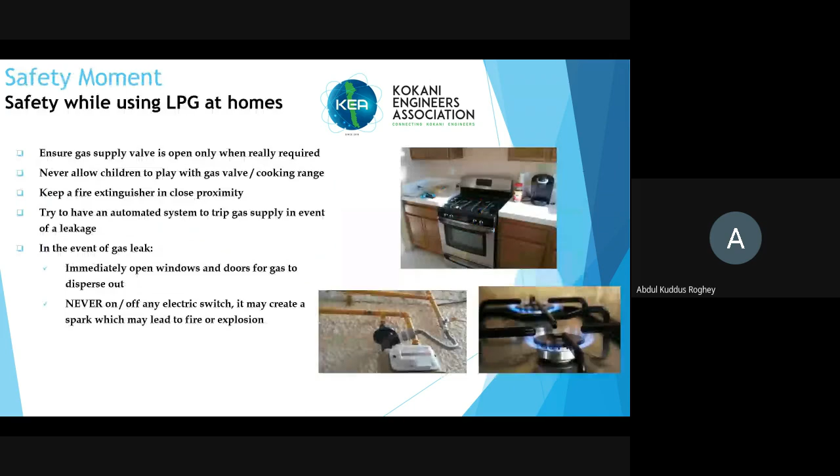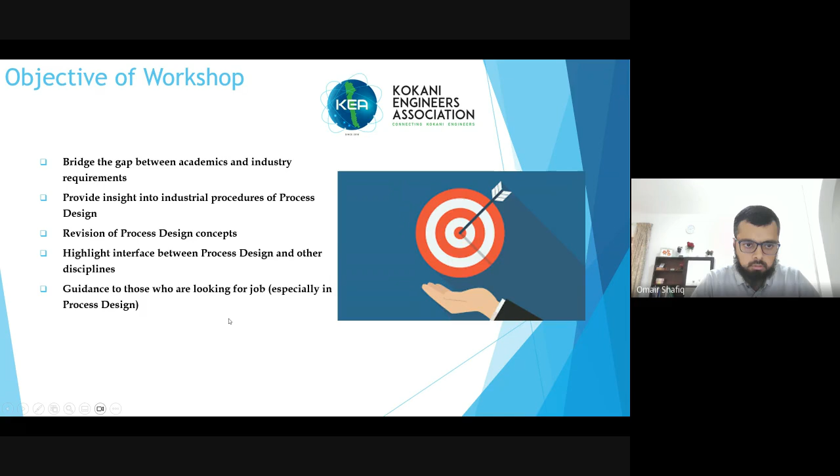We had seen a safety moment, and we had seen the objectives of this workshop also. Then we had seen basically what process plant design is all about, and why process plant design is important, or the significance of process plant design. So until here, if anyone wants to know anything more or wants to add anything, please let me know.

Omair, I have this question that most of my juniors ask me: what is the better way to have this transition from academia to the design field? And what are the preliminary requirements to get into process design, specifically process design? Could you please highlight some points so I could share with them? Because what I could share is that whatever you have learned in academia for 4 years, you just stick to those basics and apply them in your initial stages. Anything apart from that, would you like to add?

The answers to your question could vary from different people with different perspectives, but I would like to answer based on my experience and what I've heard from my colleagues as well as my juniors. One thing you should do if you want to move into process design is have a strong background, or if you feel you don't, you need to develop a habit of continuous reading. Whenever you have free time, keep reading about process design. Start from the basics, like line hydraulics, heat exchangers, and all, and keep reading from different places—books, online articles, API codes, and so on.

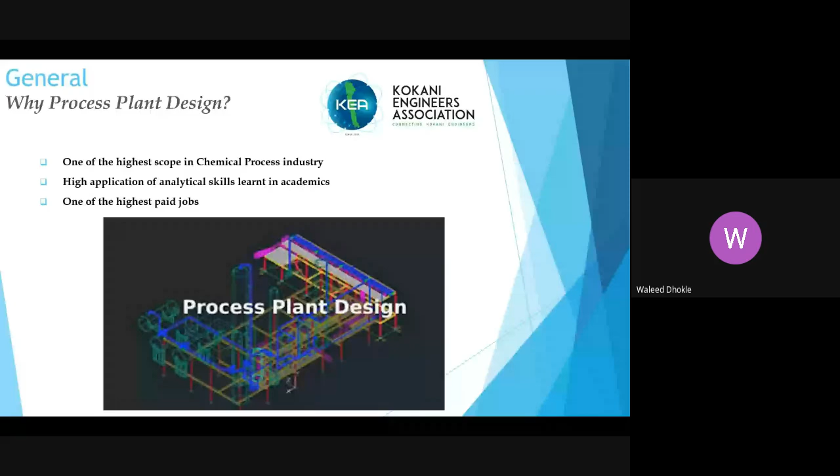Let us look into the details of each stage. We'll start with the first one, the concept study phase. What is done in this phase? The very basic things, like which technology would we use, and a basic diagram or basic flow sheet to be used. Those kinds of things are defined in the study phase.

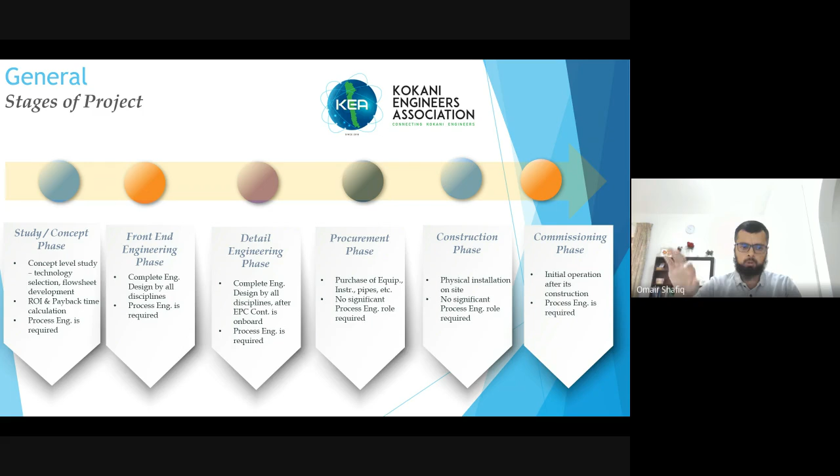Likewise, for instruments, the process engineer's job is just to specify that in such and such location, I want a flow indicator, and it has to operate from a range of 100 to 180, with so and so design conditions. That is what the process engineer has to tell. But the instrumentation engineer has to take responsibility for all the detailing of the instrument, like what instrument class it will be, what kind of automation link, hardware link, software link, coordination with the vendor, etc. So all the detailing will be done by other engineering disciplines.

Once the procurement phase is completed, next will be the construction phase. It is basically the physical installation or assembling of all the equipment, pipes, instruments, etc. in the field. In the construction phase also, usually there will not be any significant process engineer's role.

The last but not the least is the commissioning phase. Commissioning is the initial operation after the construction, after the equipment has been purchased, brought to the site, constructed, assembled, installed, everything done. Once the process fluid first starts to flow, that is called the commissioning phase. And the commissioning phase has its own challenges. It is commonly said that the commissioning phase is the most challenging phase of all.

Because in the design phase, it is just by using pen and paper, or everything stored in the form of documents. But the real challenge is seen in the commissioning phase, because even though the design was done well, everything was done good, there will still usually be several challenges once you start to operate for the first time.

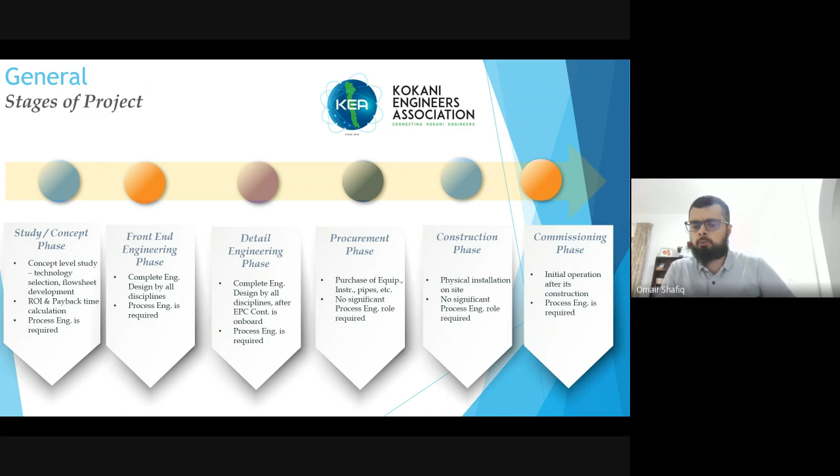Okay, this is something I'm not the right person to answer, because personally I have never done pre-commissioning work. I had done commissioning work, but never pre-commissioning. But I'll tell the very basics: before any commissioning activity is started, there will be several activities to be done, mainly by the process engineer and also by other engineering disciplines. During the design phase itself, during the FEED or during the detail engineering phase, there will be a document called the pre-commissioning and commissioning philosophy, which will outline all the commissioning aspects of that particular plant. Several other activities like P&ID have to be checked in detail, and several other documents have to be checked before the commissioning activity starts.

Okay sir, thank you. Also there is one basic engineering package. So what is the difference between this FEED and BEP?

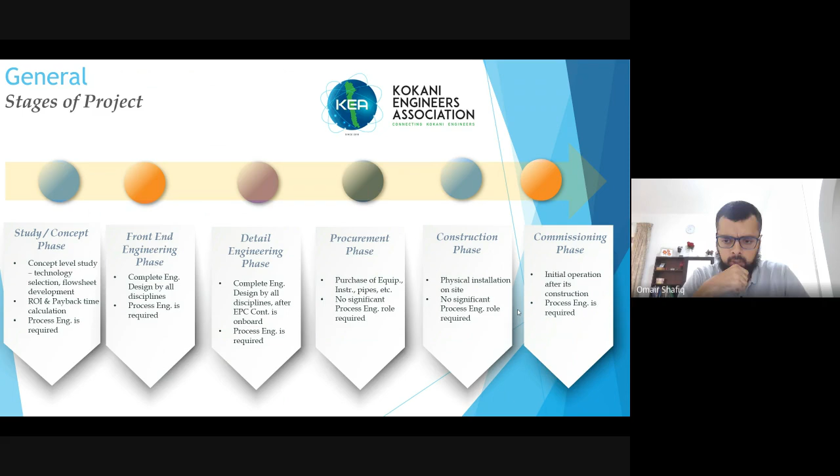Now, that is also something that varies from region to region and from company to company. For the FEED itself, what I have explained is all based on my experience with ADNOC. For ADNOC, the FEED stage, the front end engineering design, has to be done in a detailed manner. In some companies, like one I worked for in India, they had established that in FEED it is only the process engineer's design. All other engineers' design, like mechanical, instrumentation, electrical, etc., does not come into FEED, so they call that a basic engineering package, what the process engineers designed. It varies from case to case and from company to company.

Okay sir, thank you.

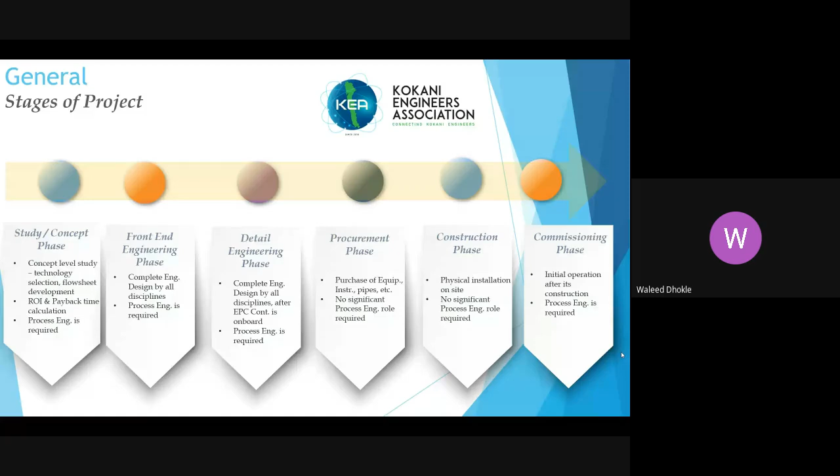To add to that: a project is divided into systems and subsystems. During construction, they define, okay, this is our subsystem for building, for example SS BLD. When the subsystems are combined, you have completion of one system. At the phase when construction is over, you have something called the mechanical completion certificate. Once it is mechanically complete, the construction element is over, and there's a phase called checking of the subsystem, like functionality checks and so on, before it is completely commissioned.

Some projects consider this as part of construction, some consider it as part of commissioning - there is no fixed concept of pre-commissioning. It can be part of your construction activity or part of the pre-commissioning activities, because it's a phase between construction and commissioning where you are checking the readiness of the particular subsystem, like functional checks of the loops and so on. Once the subsystem is okay, you go for the systems, and then the next phase comes commissioning, when you're totally ready to start up the process or system altogether.

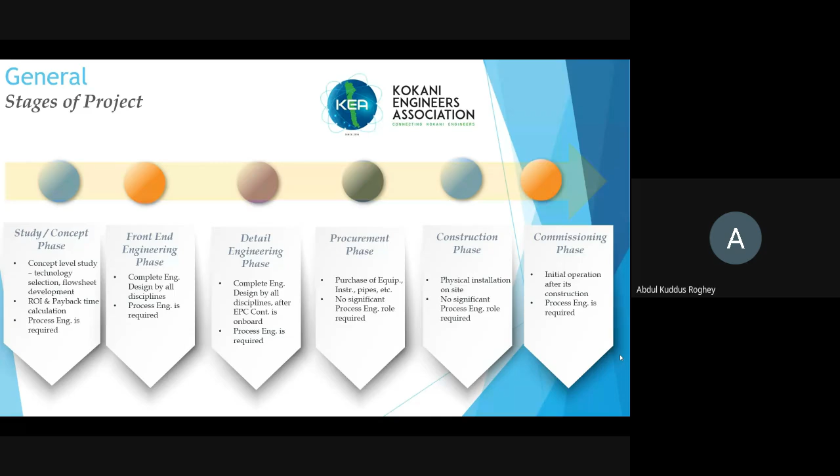Omair, back to you. Thank you, thanks for the explanation - I also got to learn something new today.

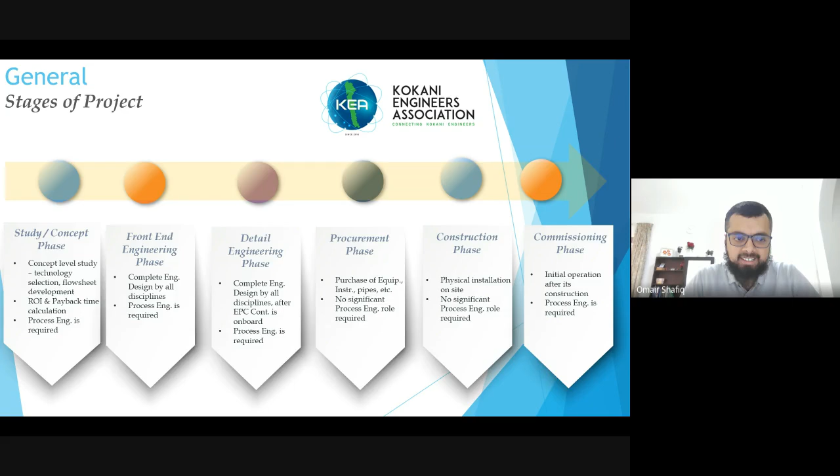Okay, so let's move on to the deliverables. This is our next topic of this workshop. Let us look into what is meant by deliverable.

Literally, deliverable means something that can be delivered - like a package from Amazon, Myntra or Flipkart that is delivered to our house. It is a packaged thing comprising whatever we have ordered, usually kept in a neat, orderly, organized, structured form, such that when anyone looks at it, he feels good. In the terminology of process engineering design, or of a project, deliverable means some document or engineering package which can be delivered to the concerned party - it can be delivered to other engineering disciplines within the engineering company, or to the construction person, or to the client, such that it should have a meaning.

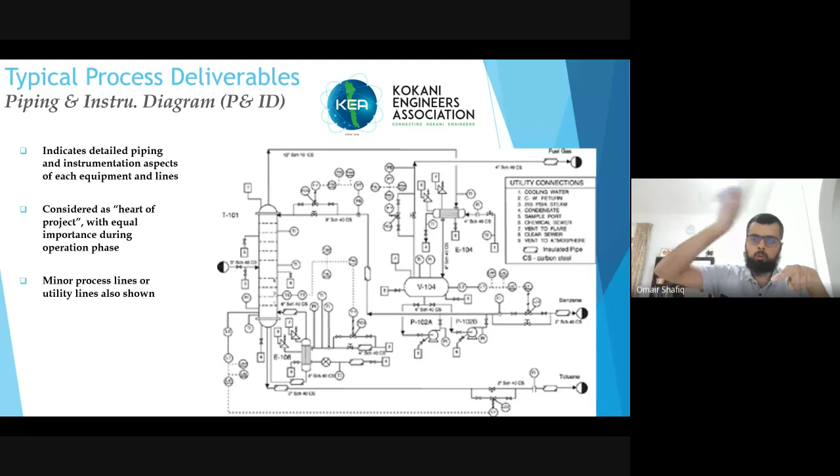Once PFD is established, a P&ID will be made. P&ID stands for Piping and Instrumentation Diagram. It looks somewhat like this. In the P&ID, it basically indicates the detailed piping and instrumentation aspects of each equipment and each line. Each and every process item, be it major or minor, is shown here, like each equipment, each pipe including half-inch or quarter-inch pipe, and each instrument, each automation connection - say so and so instrument is connected to so and so valve, how it is connected, hardwired or through a software link, whether it is located in the field or in the control room, or through PLC, SCADA, etc. These things will be symbolically shown in the P&ID.

P&ID is a document which is considered the heart of the project. Very often, when any other engineering discipline other than process has to look into the design of a process, they don't come to the process engineer to ask about the design. The norm is that they just look into the latest copy of the P&ID, and whatever is shown in the P&ID is considered as reliable information for them. So it is common to call it the heart of the project - out of all the documents, the most important is P&ID.

That's why in engineering companies, too much effort is spent on the preparation of the P&ID - not just the preparation, but its review by other concerned engineering disciplines. The review of the P&ID is also considered one of the most important and most critical aspects of the entire design activity.

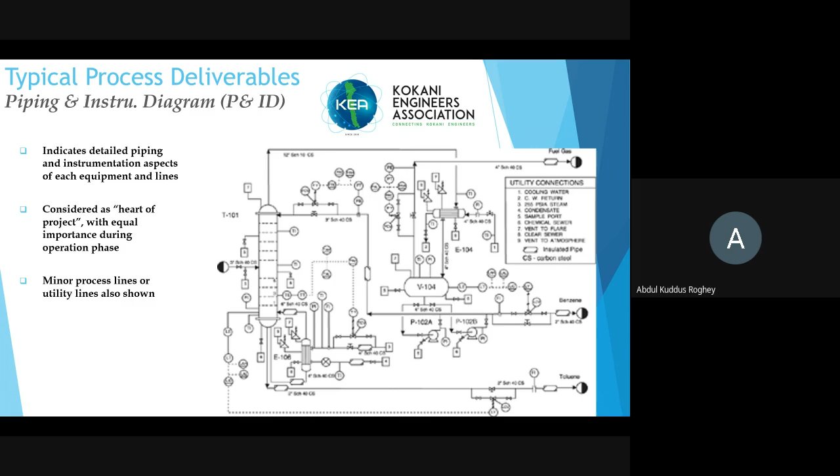Okay, clear. Yeah, clear. Thank you, Omair. Okay.

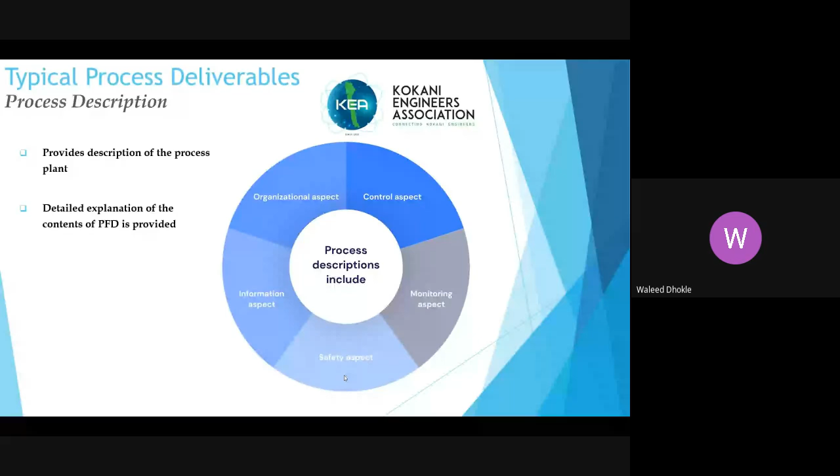Omair bhai, yeah please, will you be sharing this recording in the group, or is there any other folder you'll be keeping, or will you be sharing it on OneDrive? Well, I will be sharing it, but I myself am not sure exactly how, because it is being recorded, and once the recording is completed it will automatically get uploaded to my OneDrive link. So from there, can I directly share the OneDrive, or do I need to download it and upload it again? That I'm not sure at the moment, but inshallah I will be sharing it. Okay, I think you need to download it from your OneDrive, because we won't be having access to your OneDrive. So if you could download it, and share a G Drive link or something of that kind, it would be very helpful. Okay, inshallah.

Let's continue now. Just confirm once if you're able to see my screen. It's visible and it is changing, right? One of you, please confirm if the changes are being observed, like when I change a slide, is it being seen?

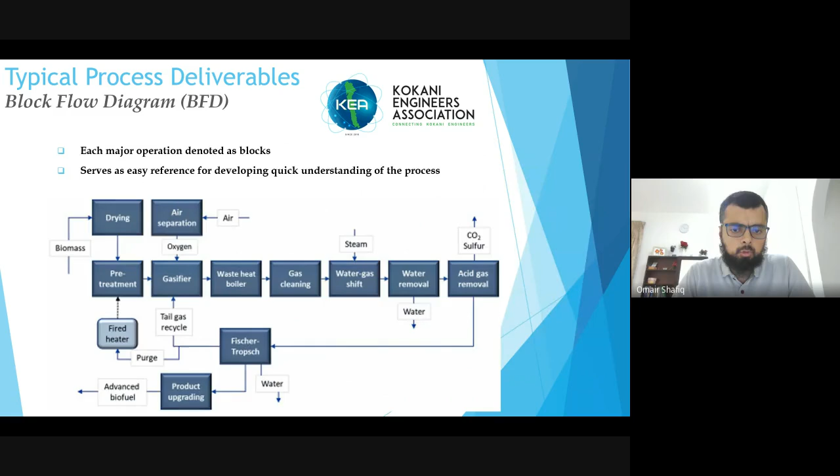Okay, so let's continue. Before the break, we had seen the deliverables or basic deliverables which are called drawings. We had seen BFD, PFD, and P&ID. Now, the next deliverable is process description.

It is basically a document prepared by the process engineer in which the process items are described, or in other words, it is called a write-up of the PFD. In the PFD, each process is indicated in the form of drawings, but drawings leave room for confusion or different explanations. Because of that, a separate document is made called the process description, in which the aspects shown in the PFD are described in words, starting from the initial feed all the way up to the final product, and whatever process activity goes in between is also explained in words.

The description includes aspects like safety, monitoring, control, etc.

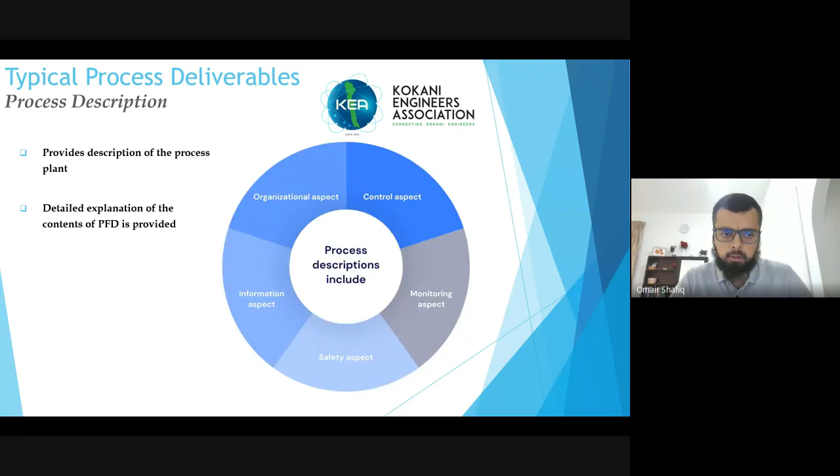So it's kind of a detailed record in which, for each stream or part of the process, what are the conditions - pressure, temperature, enthalpy, etc. - are captured.

And it serves as an input to equipment sizing and line sizing. Once I develop the scheme and need to start with equipment sizing, I need to know whether this column's height will be 5 meters or 20 meters, or the capacity of the pump - should it be 100 or 200, etc. So to calculate the equipment sizes, the H&MB serves as a quick reference.

Likewise, to do the sizing of each line shown - should the line be 8-inch, 12-inch, 2-inch, etc. For doing the sizing of each line, H&MB serves as a quick reference. In such and such line, based on the flow rate and operating conditions, my size will be 3-inch, suppose here it will be 4-inch. So it serves as a reference for the entire equipment and line sizing.

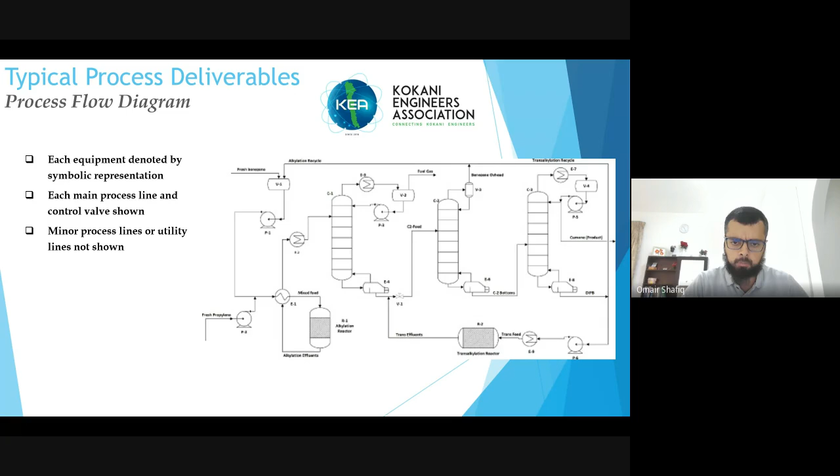Inshallah, when we look at Aspen HYSYS, we will be looking at development of H&MB as well. That was about H&MB. Before we move on, I would again like to pause here so that if anyone has any query, we can discuss further.

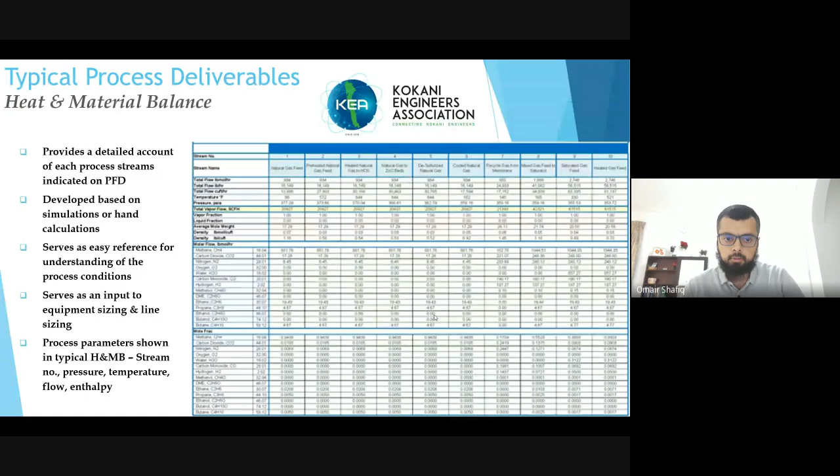Let's move on. Let us move on to operation and control philosophy.

Once the drawings are completed, once the process design basis or the basis of design has been established, and once the H&MB has been developed, the next important thing is operation and control philosophy. This document outlines the philosophy of operation and control of the entire plant, from the battery limit inlet or the main feed up to the main product, and not just main, all the inlets and all the outlets. What is the philosophy on which you will operate it?

Here, the operating conditions with the entire operating envelopes will be defined. By operating envelope, I mean the range of operating conditions, like minimum flow will be 100, normal will be 180, maximum 200. So the operating envelope is from 100 to 200. Similarly, minimum temperature may be 70 degrees, maximum 90 degrees.

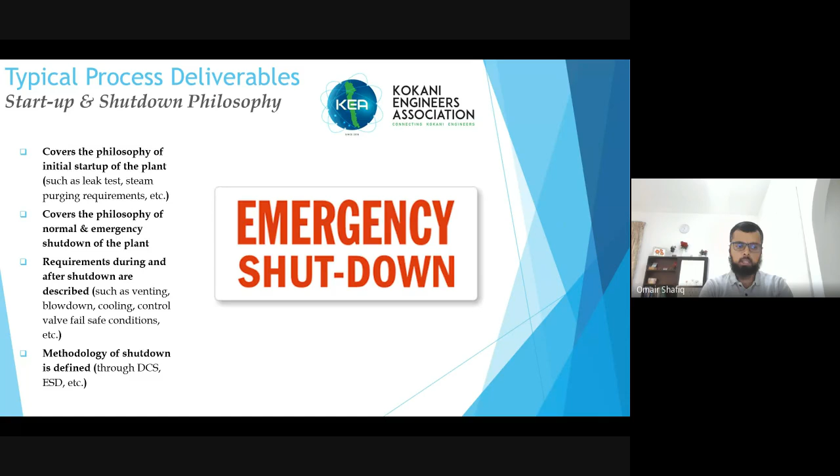Now, the methodology of the shutdown - will it take place through a DCS or through an ESD? And will it be through a hardwire, a software link, or anything else? These kinds of things are explained in this document.

Till here, does anyone have any further doubt or discussion?

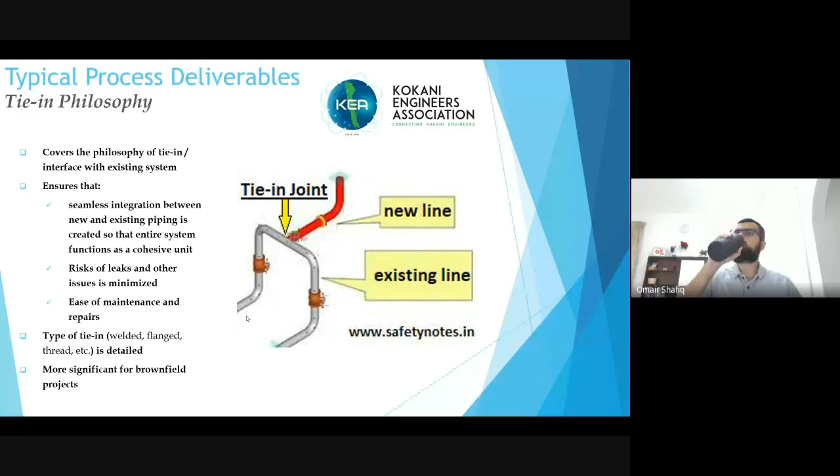Yeah, Umar bhai, assalamu alaikum. Islam. Am I audible? Yes, yeah, you are audible. Yeah, it's not a doubt, I just want to add something. This is not related to this particular slide, but the one before. Sure, just correct me if I'm wrong or if something needs to be added.

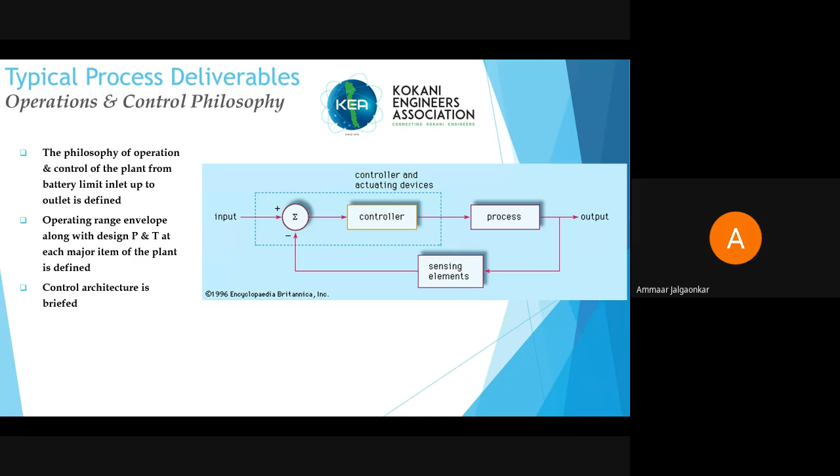Am I right, Mr. Umar bhai? Yeah, what you have mentioned is about something which is already pre-decided. Yes, that is also something that varies from project to project and from company to company, and it varies based on the nature of the type of contract. There will be some clients who, in the scope of work itself, will mention in detail about the control aspects. So in those cases, the engineering contractor, whoever it is, like the process engineer, instrumentation engineer, etc., they have to just stick to that, whatever it is. And in that case, this will just be an elaborate description of the scope of work.

In some cases, from the client side, the entire scope of work, even though the project might be worth hundreds of millions, the scope of work document itself will not be more than one page. So in those cases, this type of control aspects will not be detailed, and it is the engineering contractor or engineering consultant who needs to do the design in detail, and the client has to approve or reject it.

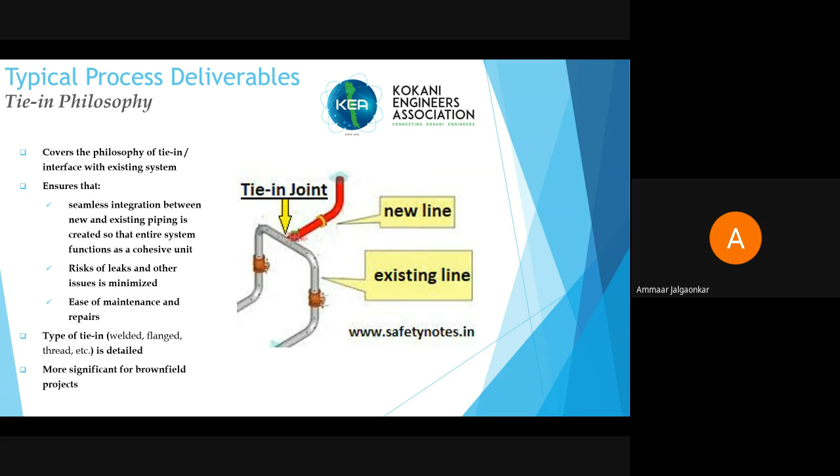The next document which has to be prepared by the process engineer would be the tie-in philosophy, or tie-in, like how you are going to tie in with the existing system. In most projects, some plant is already there and an additional plant will be built, or some equipment or packages are already there and additional equipment will be installed, maybe to increase production or to overcome some maintenance issue. The new plant is made and it has to be tied in or interlinked with the existing one. So this document, called tie-in philosophy, is also prepared by the process engineer, which covers how the new will be linked to the existing.

The aim of the tie-in philosophy document is to ensure there's a seamless integration between the new and existing piping, such that the entire system functions as just one cohesive unit. This means there will be several existing pipes, sometimes in brownfield jobs.

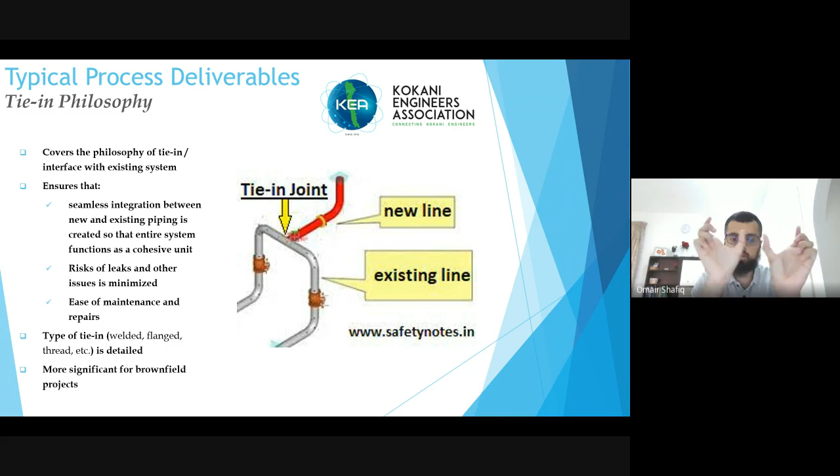Now, for each of the tie-ins, what type of tie-in will be required? This is something the process engineer will not be deciding, but rather the piping engineer or mechanical engineer who has to decide this. For each type of new and existing tie-in, does it have to be done by welding, by a flange, by a thread, or anything else? That's what this document covers.

Next is about vent and drain philosophy. This document basically covers the philosophy of emptying the contents of the process plant.

If the process plant has several liquids, gases, solids, two-phase, three-phase, etc., when we want to empty it out, how are we going to do that? Normally gases are emptied through vents, liquids through drains, and what more? So it's all about how you empty out the contents of the plant.

Emptying can be either normal or emergency. Normal emptying is usually done through scheduled draining or venting, and emergency emptying is done through depressurization valves, blow down lines, or PSV reliefs. So under normal and emergency conditions, how are we going to empty out the contents? That is covered in this document.

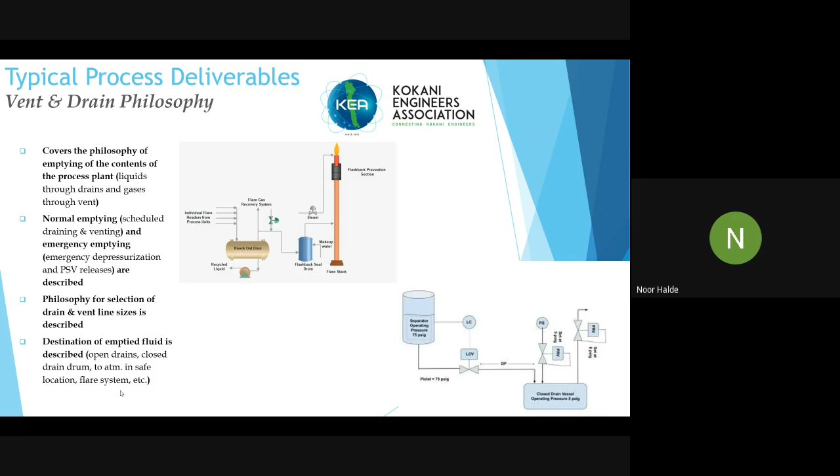Omair bhai, is there any standard format available to prepare the control philosophy? I heard about the sequential flow chart, but I am not aware of any standard format for control philosophy.

Okay. Format, now, that is something each company has its own format for. I can also take something and share it with you.

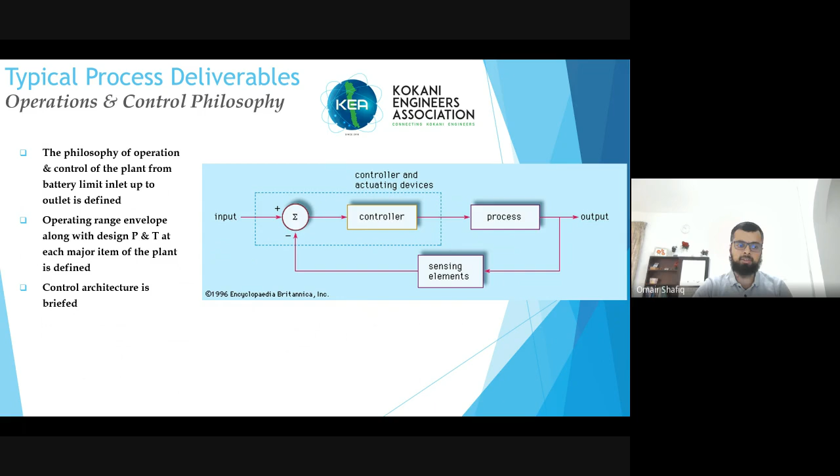But yeah, the bottom line is the same. Irrespective of the format, it has to cover the entire operating envelope from each part of the plant. Its operating envelope must be covered and its control envelope must be covered. That is the basic thing. Now, company to company, project to project, the format may vary.

After vent and drain, let us go to another document called process safeguarding memorandum. How are we going to safeguard the process, what are the levels of safeguard, and what is the philosophy or way in which the safeguard will be established? Those things are covered in this document.

One of the basic things is having an ultimate safeguard for any plant, to avoid any mishap or accident happening. There are 3 levels of safeguard. The first level is the design pressure itself. It is kind of an inherent safeguard.

To explain this further, suppose a particular part of the process plant is operating at a pressure of 8 bar gauge, and the design pressure for that part of the plant is 12 bar. So 8 is the operating pressure, but it is actually designed to withstand 12 bar. That additional 4 bar margin is itself a safeguard. What if the pressure increases all of a sudden, or something goes wrong? So an inherent safeguard is there: 8 is operating, design is 12, 4 is the safeguard.

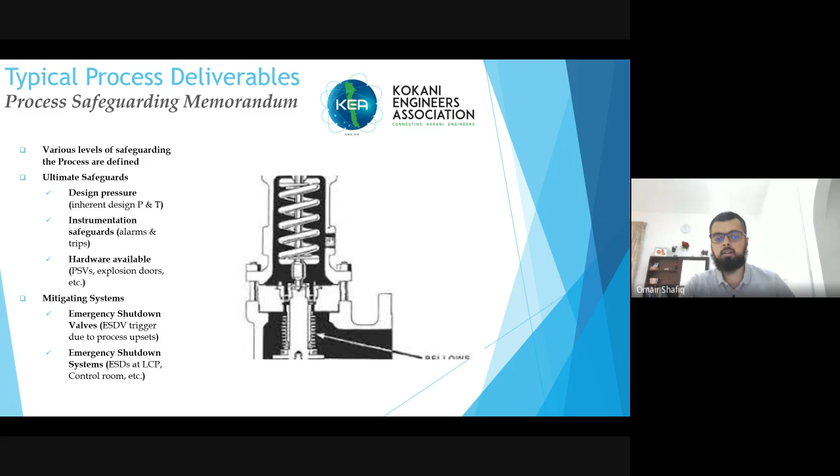So to avoid that happening, there has to be an automatic system in which as soon as the level exceeds a particular limit, the inlet valve has to close. So what do you say here?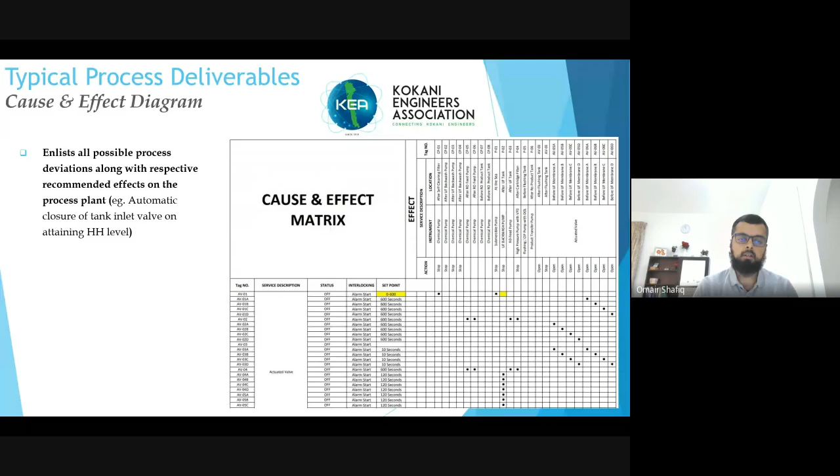Another thing which is related to cause and effect is alarm and trip list. This is another document which has to be made by the process engineer, in which the details of each alarm and trip, the values of each alarm and trip will be mentioned.

Just an example of what I gave: 8 bar was the operating pressure. At 10 there will be an alarm, and at 11 there will be a trip. So the list of all these alarm values applicable for that particular plant, along with the trips, will be mentioned in this alarm and trip list document. Although not always the same, but usually it lies under these values.

If the value goes to 80 to 90%, an alarm has to ring. At 90 to 95%, it has to trip. Just consider an example of a level.

Suppose there's a vessel in which the level can go anywhere between 0 to 100 inch. Level of liquid can vary from 0 to 100 inch, and normally it should be somewhere at half, or it should not be below 20% or should not be above 80%. But because of any reason, if the level keeps exceeding till it reaches 80 or 90% range, there should be an alarm to alert the operator that something is going wrong, immediately take action.

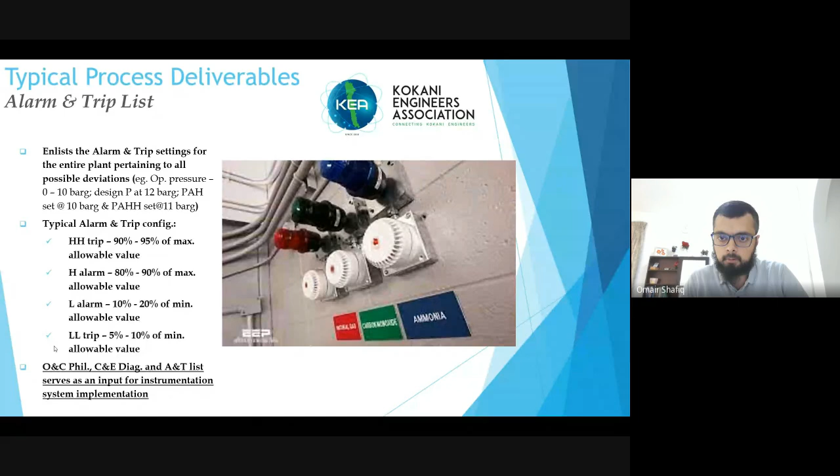Our next topic or next important deliverable is line list. A line list provides a list of all major and minor lines indicated in the P&ID. All of us have seen a P&ID, and in the P&ID, we have seen that each line is assigned a particular number, and for each line, the details of each line, or the details of each pipe, are mentioned in a separate document called as line list.

Line list is made so that it serves as an easy reference, or serves as an input to piping and instrumentation disciplines.

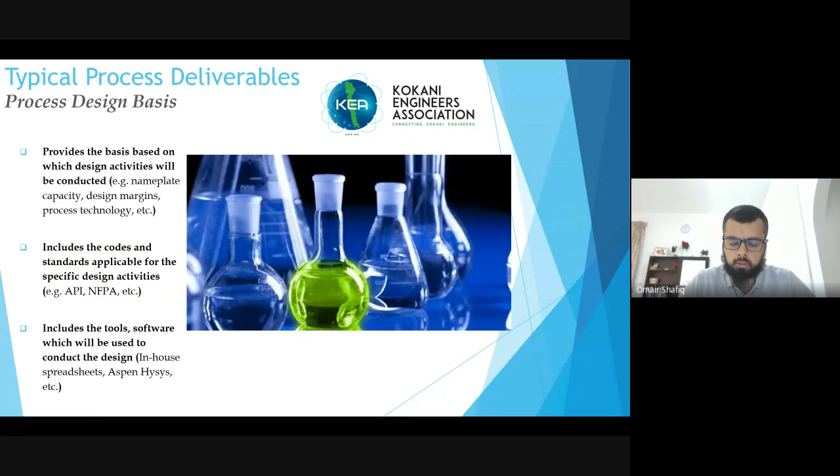As an example, if I had a P&ID over here, if any other discipline during the design phase or even in operation phase wants to know the density in this line, the line which comes from here to here, what will be the density, or what will be the operating pressure, or what will be the design temperature, based on those parameters, the instrumentation engineer will purchase the control valve. So it is very much vital, very much important to have the details of each and every pipe.

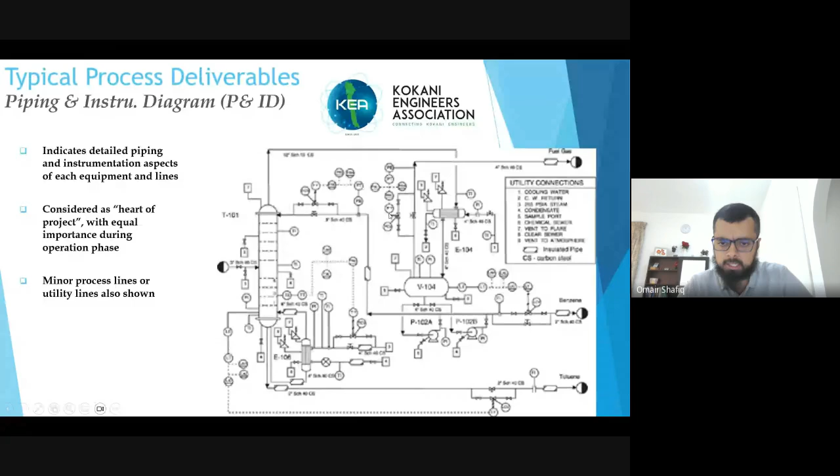So this line list document gives detailed information about each and every pipe in the P&ID.

Now, what kind of information will be shown in the P&ID?

What kind of information will be shown in the line list? Information like P&ID number, like so-and-so line, which I am mentioning in my line list, it is in which P&ID? What is the line number? And where is the line coming from? Say it is coming from a vessel, going to a compressor. So that should also be mentioned. It's coming from vessel number so-and-so, going to compressor number so-and-so.

And what are the operating pressure and temperature of that particular line? What is the design pressure and temperature of the line? What is the flow rate I'm expecting in that line? What is the velocity, what is the speed through which fluid will be moving in the line?

What is the density, viscosity of the fluid in that line? What will be the size of the line? 10 inch, 8 inch, 2 inch, etc. What will be the fluid? Will it be a hydrocarbon, corrosive, or liquid, or hazardous fluid, gas, etc.?

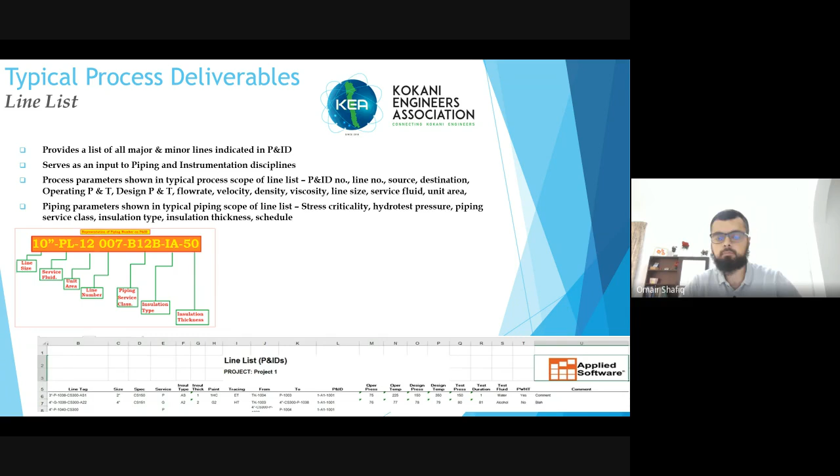The next topic is on equipment datasheet. Equipment datasheet is a document which is usually, although it is owned by mechanical - by saying owned means it is the responsibility of mechanical discipline, but inputs are given by the process engineer. Now, for each equipment, either it is a vessel, storage tank, pump, compressor, etc.

For each equipment, a data sheet will be made. And why is the data sheet made? Because the data sheet is made by the engineering team comprising of process and mechanical, and ultimately it is given to the supplier, or given to the vendor, so that the vendor can develop his design, or provide his cost. That is why equipment data sheet is made, or it is kind of a thing in which the engineering team transmits the information to the vendor by means of the data sheet.

Like, through the data sheet, the engineering team conveys to the manufacturer or to the vendor that I want this equipment, it should have so and so specification. So all these kinds of specifications for each equipment are captured in a document which is called the equipment datasheet.

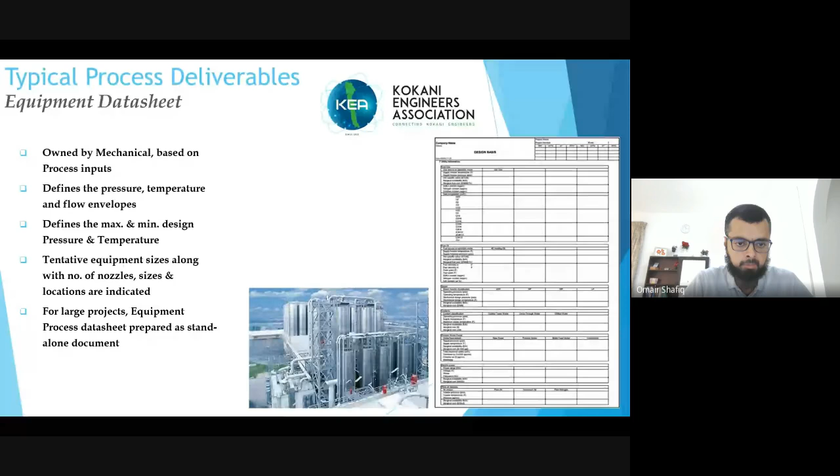Just a thing to be noted here: for anyone into process design, in some cases, especially in large scale projects, there will be 2 separate data sheets for each equipment. One will be made by the process and another by mechanical. The process equipment data sheet will only consist of process based information, and the mechanical engineer, based on the process data sheet, will produce his own separate data sheet which will be more detailed. But in small scale jobs, there will not be 2 separate documents, just one data sheet for each equipment. The mechanical engineer will own the data sheet based on inputs given by the process discipline.

Another thing identical to the equipment datasheet is the instrument datasheet. What we had seen for equipment, for each equipment in the plant, was kind of an interface between process and mechanical. Now, instrument datasheet is kind of interface between the process and instrumentation disciplines. It is owned by instrumentation, so the instrumentation engineer has to take responsibility, but it has to be made based on inputs received from process engineers. Again, identical to the equipment datasheet, the ranges of operating pressure, operating temperature, flow, design pressure and design temperature, all these things will be established in the instrument data sheet.

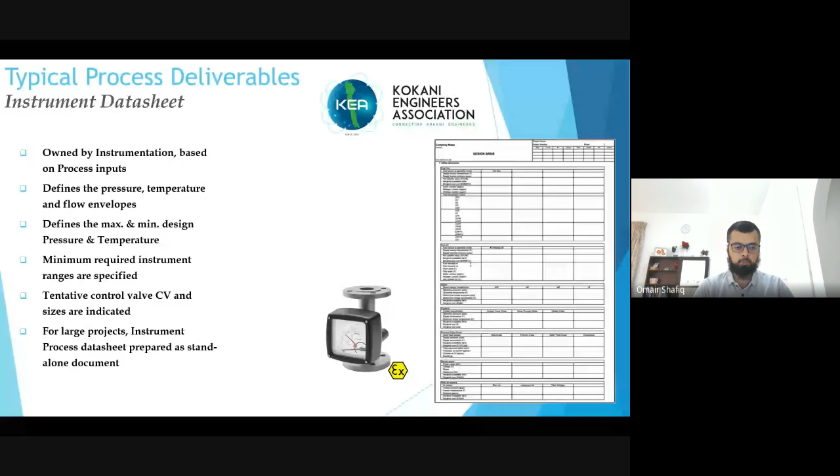A data sheet has to be made for whatever instruments are there. Again, like the equipment data sheet, if the project is quite small in nature, usually only one data sheet will be made for each instrument. But for large scale projects, two separate data sheets will be made: one by the process engineer, the other by the instrumentation engineer, which will be much more detailed than the process engineer's instrument data sheet.

It's all about this. The hazard analysis topic is something quite large, and just to cover it will need some good amount of time, so we can keep hazard analysis for our next week's workshop. It is almost 11:20 over here in UAE, so we can use the remaining time of this workshop to have some general discussions. If anyone would like more clarification on what we have already discussed, you can have it.

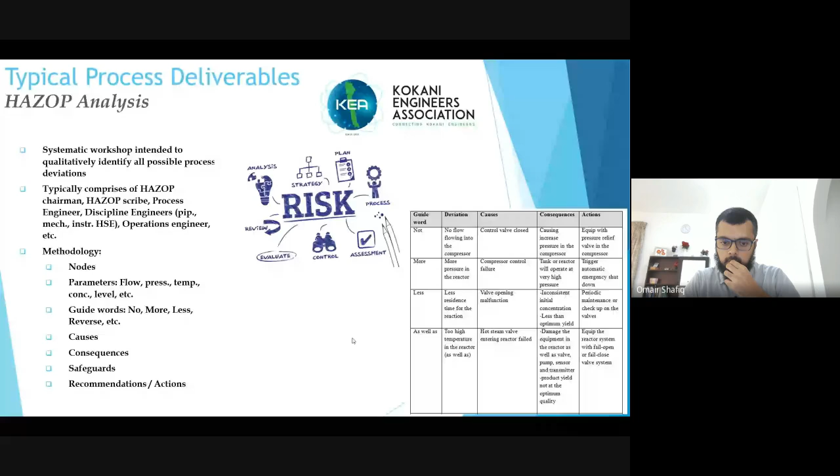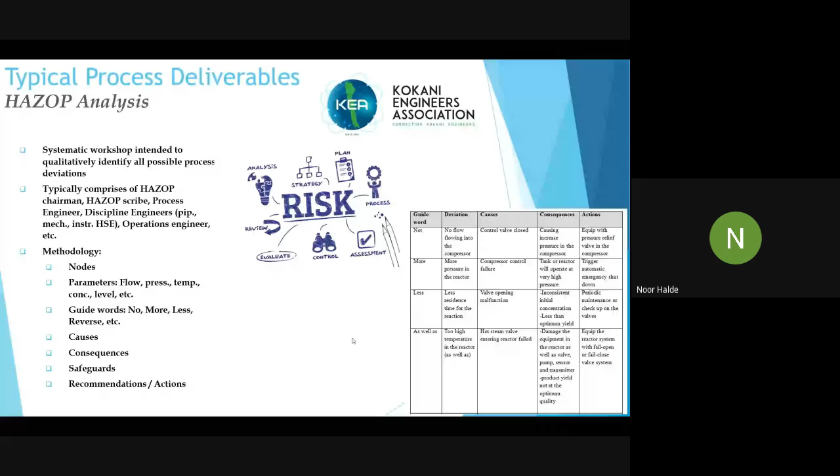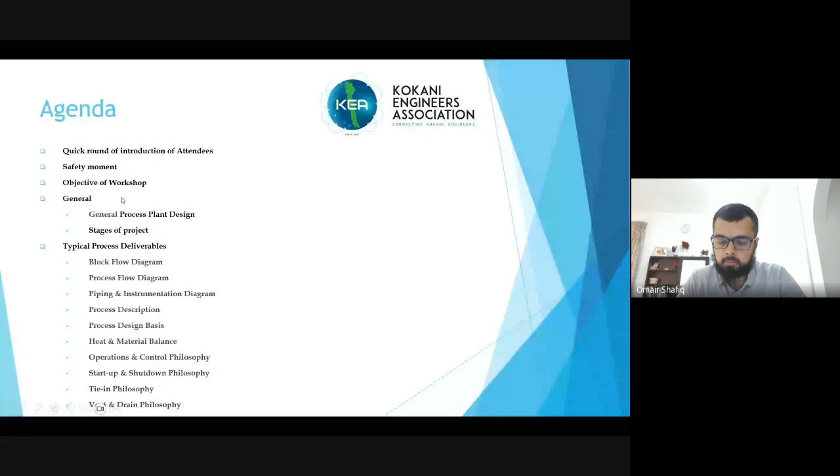Okay, we'll also have a quick check on the agenda - where we have reached and what we are yet to cover. This was our agenda. We have seen the objective, some general items, and we have seen things like BFD, PFD, P&ID, process description, design basis, H&MB, OCP, startup philosophy, tie-in, vent and drain, safeguarding memorandum, cause and effect, alarm and trip list, line list, and equipment and instrument data sheets.

We are yet to continue on HAZOP analysis, and after that we'll be seeing some basic concepts commonly used. That will be the heart of this workshop. We'll be covering, inshallah, the basic concepts that every process engineer would be expected to know. Besides this, there are several other things which can be covered, and if time permits, inshallah, we'll cover a few other things as well.

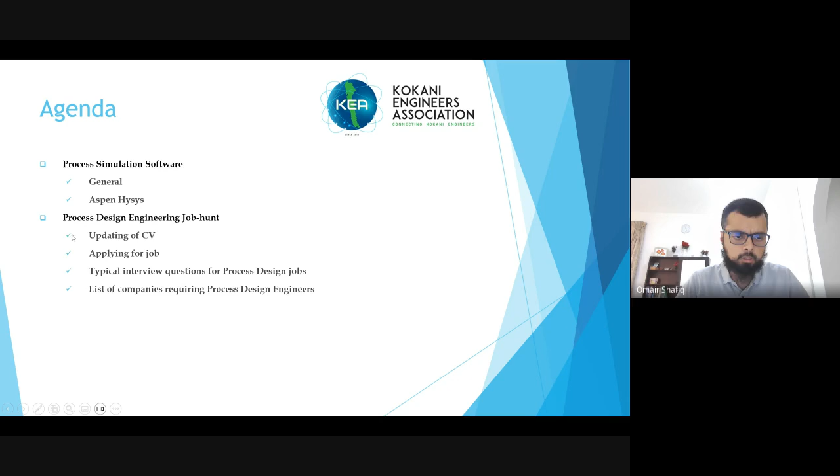But yeah, these are some basic questions, and if we go for any process engineering role interview, I can say at least half of the questions will be around these topics only: line hydraulics, pump hydraulics, heat exchanger, column, control valve. Inshallah, we'll also look at some case studies on process simulation software, and lastly we'll be covering some job hunt aspects as well.

There was one request by one of the participants, and I would like to address it. One participant had requested that next week's workshop, if possible, be postponed to the week after - instead of having it next week, we continue it the week after next, and have the last workshop in the first week of January. So this was a request by one of the participants.

I would also like to hear from everyone. I believe those who are here will be continuing till the end, so I'd like to hear your opinion on this. On one hand, it's good to have everything in one go - but will everyone be available? Better to make it one go, or we can change the time also.

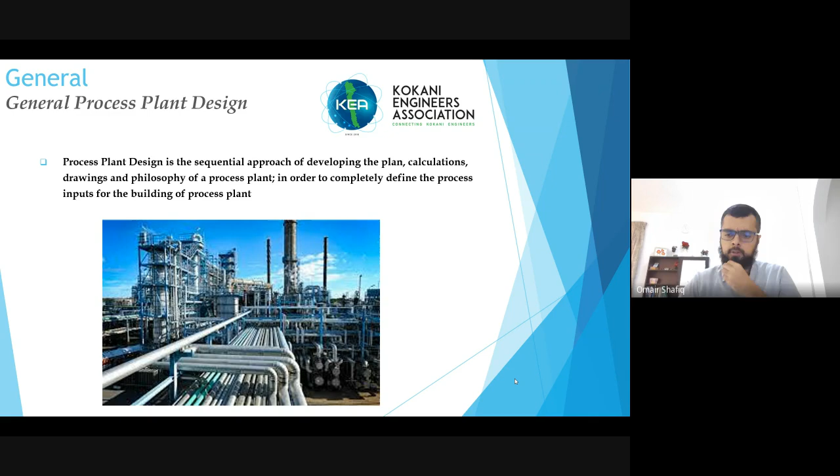Okay, considering this, I think let us continue with our workshop as planned. Next week we will be having it, and we'll also have it the week after that. It's best that we complete everything by December, because postponing was also considered, but everyone will have his own schedule. If you postpone next week's workshop, there might be someone able to attend next week but not the week after.

Amma, do you have any opinion on this? No problem from my side - anything is up to you, depending on everyone's availability. For me, Saturday is also possible, and if you postpone from next to next week, that's also okay, no problem from my side. So let's continue - let's continue next week.